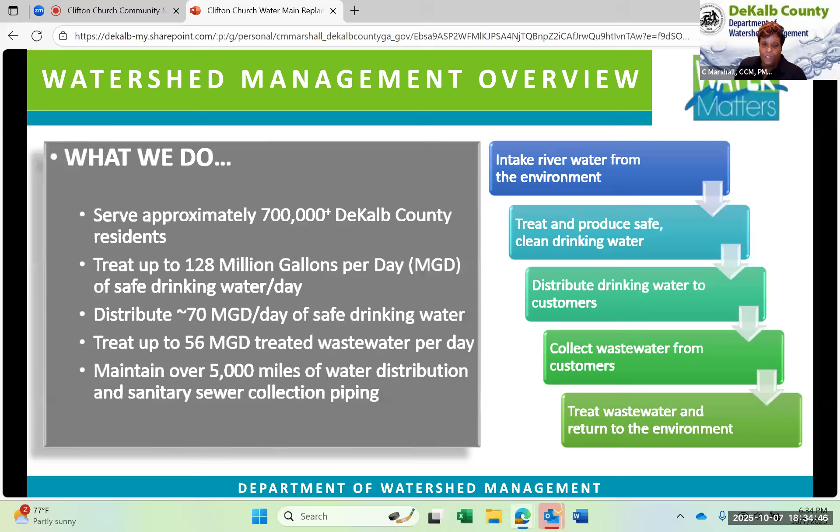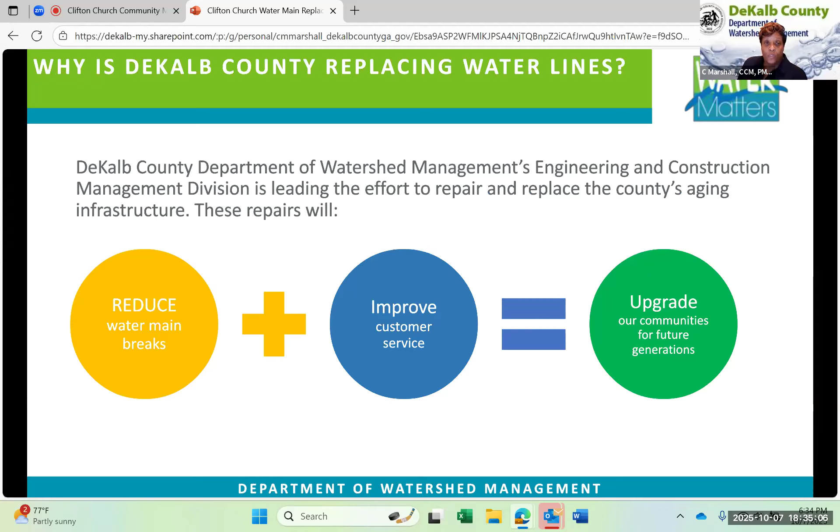Team introductions. Along with DWM, we also have a host of people who help us get this work done. We have AECOM, our program manager. The construction management from the consultant team will be handled by CGA Solutions, and the contractor is Ruby Collins Contractor.

Now you will hear from Mr. Bobby Kilpatrick, the construction project manager for this project. He has over 26 years of experience and has managed large and small projects. He will ultimately get this job done in a timely fashion.

I'm Bobby Kilpatrick. As Ms. Cassandra Marshall stated, I will go over the problems and the solutions of this project.

We have excessive water main breaks. We faced about 59 water main breaks from 1989 to 2024, with aged infrastructure installed between 1947 and 1955. Our operational inefficiencies include tuberculation, undersized pipes, and corrosion.

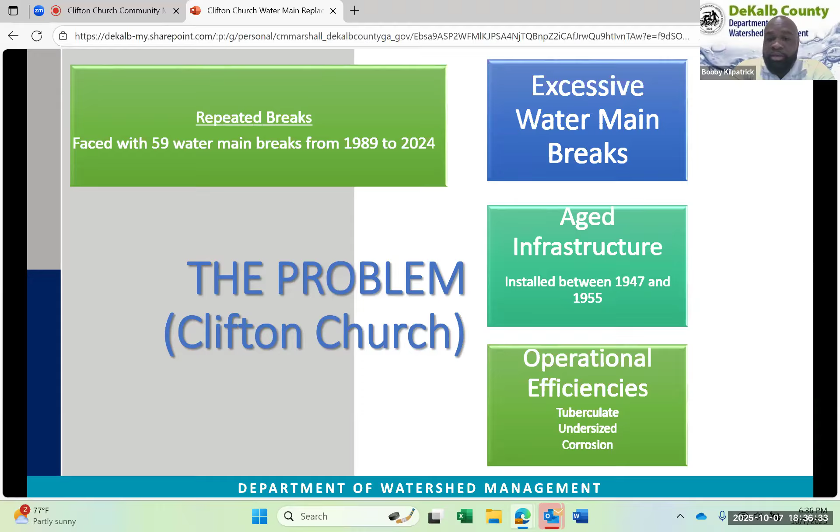Capital improvement project overview and the solution. In 2024, the Board of Commissioners approved a new CIP for $4.27 billion for projects to be completed from 2025 to 2034. A capital improvement project is one that helps maintain or improve an asset, through new construction or replacement of infrastructure.

The Clifton Church water main project is a $6.1 million project that is included in this plan.

The CIP team is responsible for executing the work after the engineering has been completed. What we plan to do is reduce emergency repairs, stop the breaks, protect the environment, and improve sustainability.

Now you will hear from Mr. Andre Martin, who is our inspection supervisor.

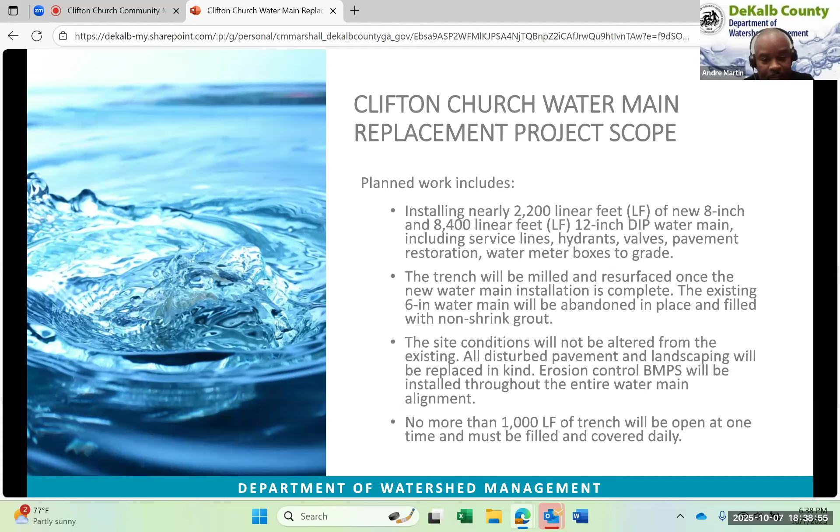The project overview is we're going to start at Clifton Church. We're going to go at Clifton Church from Boulder View, go down Clifton Church, and then come back up Clifton Church Road till we get to Flat Shoals.

There are approximately 500 residents that are impacted by this project, and it's in DeKalb County. The following streets will be affected: Gresham, Boulder View, Parker Ranch, Zane Grey, Tally Ho Drive, Richard Allen, Wee Kirk, Knight Court, Hallmark Court, Coral Drive, Cottonwood Drive, Clifton Springs Way, Clifton Springs Road, Flat Shoals, and Meadowview Drive.

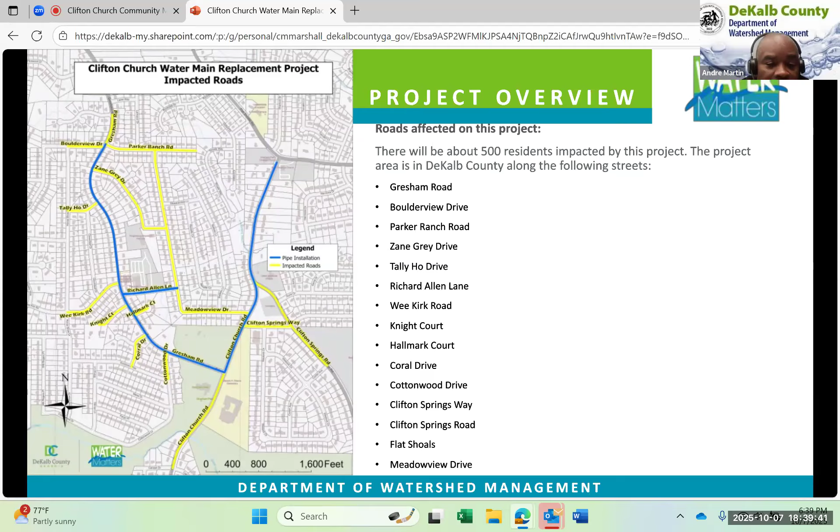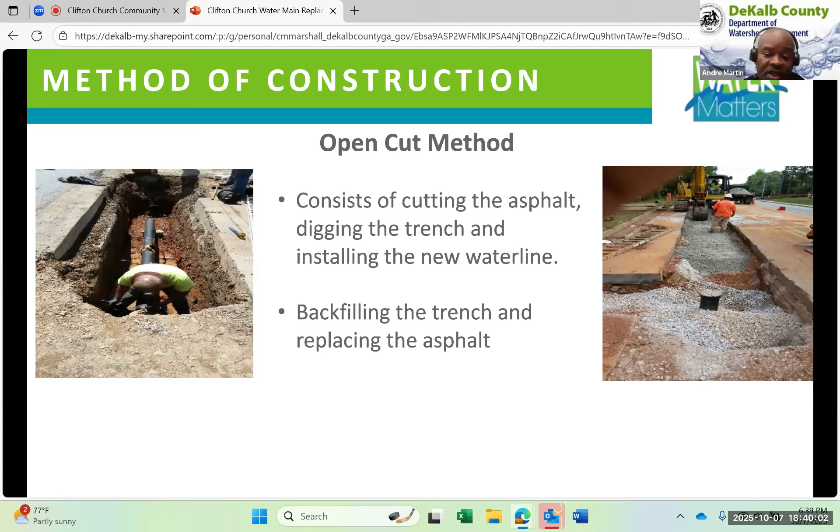The method we're going to use to install this pipeline is called open cut. It's when we saw cut the road, and then use a trackhoe or heavy equipment to dig that trench up. We go down about 3 or 4, sometimes 5 feet. We install a new line in that trench, backfill it, and replace it with asphalt daily.

The project is scheduled for 9 months, 9 to 12 depending on weather. Since we get into the winter months, that might slow us down a little bit, but usually we're able to stick to this program.

We're going to send out community notices October 3rd. This is our community meeting October 7th. Contractors plan on mobilizing October 13th, with construction starting on October 20th. We'll probably do the final restoration and paving sometime in the spring of 2026, and this project is scheduled to end in July 2026.

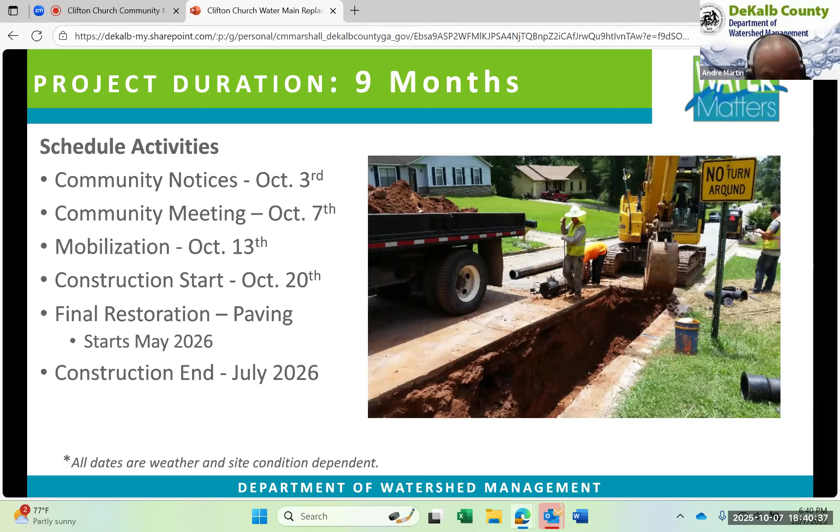Boots on the ground is what we call when we actually get the forces out there, and that's when we're going to do that, as mentioned in the previous slide.

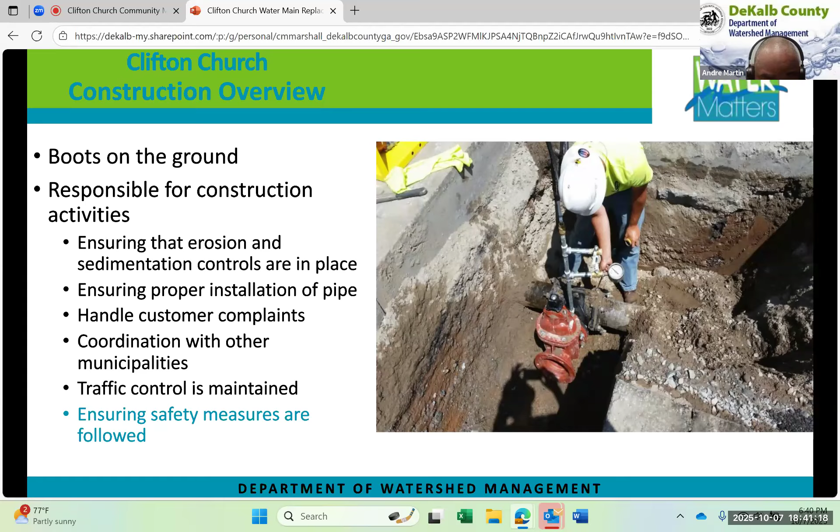Boots on the ground is responsible for construction activities, erosion control, ensuring we have the right pipe put in the correct place, and handling all customer complaints. That will be done by me, some of my staff, and/or some of the contract inspectors. We're going to coordinate with other municipalities as needed, and traffic control will be maintained at all times. We'll always ensure everyone is safe, and our safety measures will always be followed to the T.

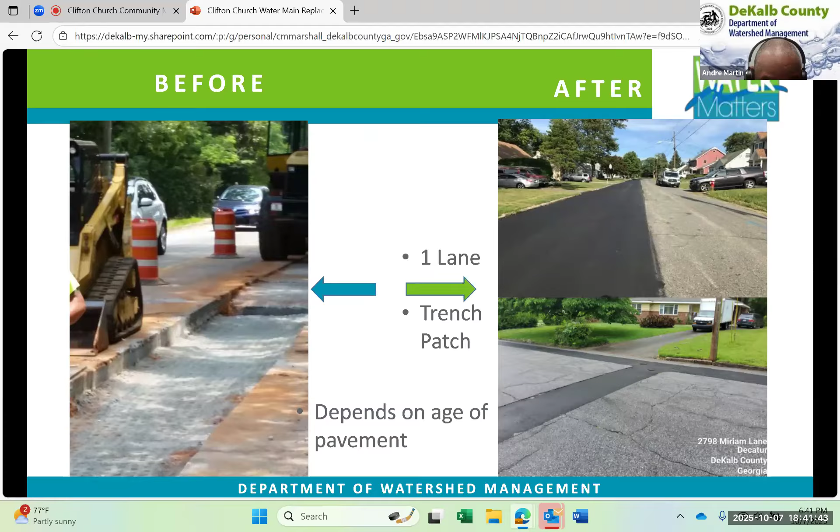This is a before and after picture. It shows what the trench is going to look like when we finish putting the pipe in. The gray is graded aggregate base, we call it GAB. The end over to the right is what it's going to look like when we finish, something similar to that. We're going to pave the whole lane over from half the road over to whatever side of the road we're working on.

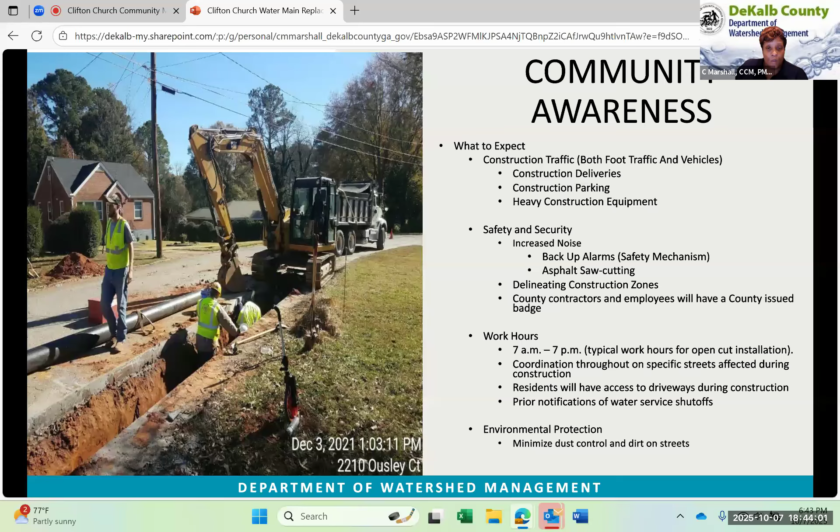The contractor is going to provide traffic control to guide residents through the construction zone. Initially, the contractor plans to have one crew starting work from Gresham Road at Boulderview, heading south on Clifton Church. Later, a second crew will come in and start at Flat Shoals and Clifton Church.

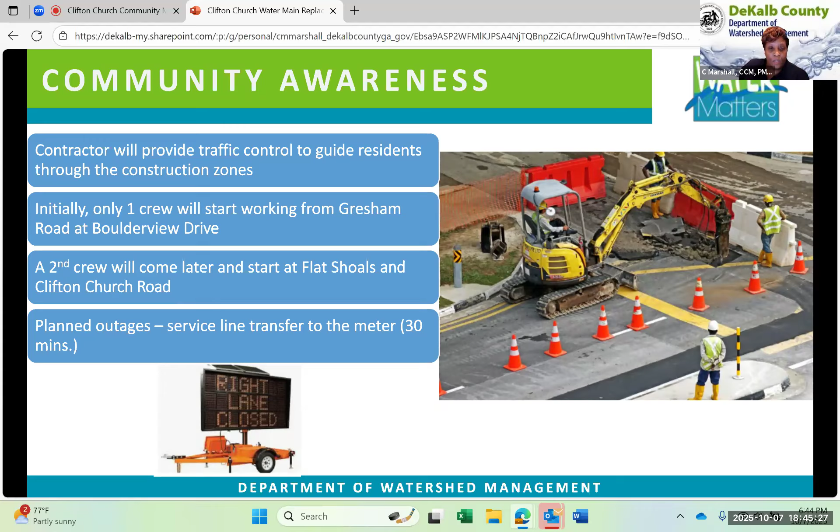Planned outages, such as the service line transfer to the meter, this is typically no more than a 30 minute interruption. We should give you a notification probably a day or two prior to that interruption, just so you're aware of it coming forward.

Next, you will hear from Ms. Patrice Johnson. She will provide a public communications update.

Good evening, everybody. My name is Patrice Johnson. I am a public education specialist for DeKalb County Watershed Public Relations Division, and I have over 15 years of watershed experience.

We also have an email that you would receive. If you put your email address in the chat, we can add you to the email list for this project. On that email list, you will receive updates, changes for the schedule, any delays, anything that has to do with this project.

Other ways that we communicate with you: we have a project hotline, and a website that would have project information where you'll be able to see this video, this presentation, as well as any other communications that have gone out about the project.